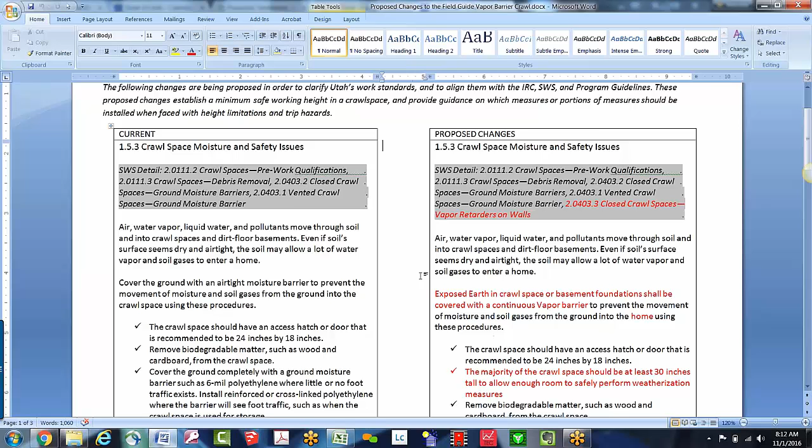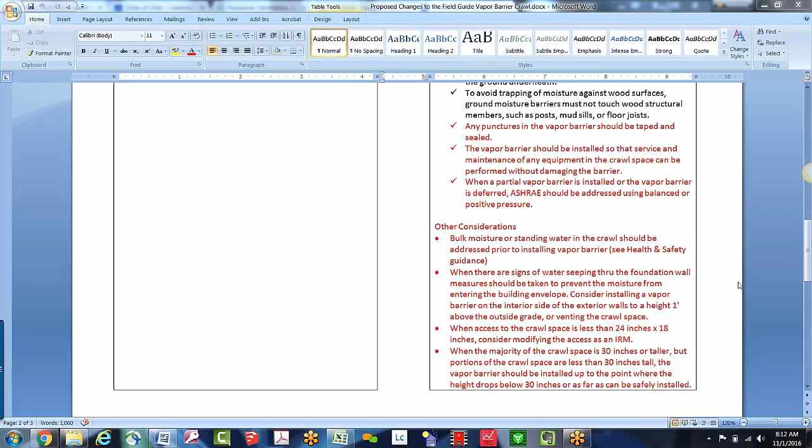What that means for you guys is this whole 30-inch rule will probably go into effect. I've heard some of you already implementing it, and I'm okay with that — just know as you're implementing it, it's not in writing yet. I just wanted to quickly review what we proposed. This was stuff put in front of this group a few months ago for a comment period. That comment period closed, so unless somebody reaches out to me today or tomorrow, we will proceed to put this into our actual rules.

But the main thing here is this whole 30-inch rule, so let me quickly read through it. It says when the majority of the crawl space is 30 inches or taller, but portions of the crawl space are less than 30 inches tall, the vapor barrier should be installed up to the point where the height drops below 30 inches, or as far as can be safely installed. It goes on to say other weatherization measures in the crawl space, such as air sealing and insulating, shall also be installed according to the 30-inch height limitation.

Then the next bullet: when the majority of the crawl space is less than 30 inches tall, the vapor barrier and all other weatherization measures in the crawl space should be considered for deferral. So we wrote this policy to allow you guys, when you run into space limitations in crawl spaces, to defer or not do weatherization measures in that space, but still go upstairs and do all the other weatherization measures that you can do.

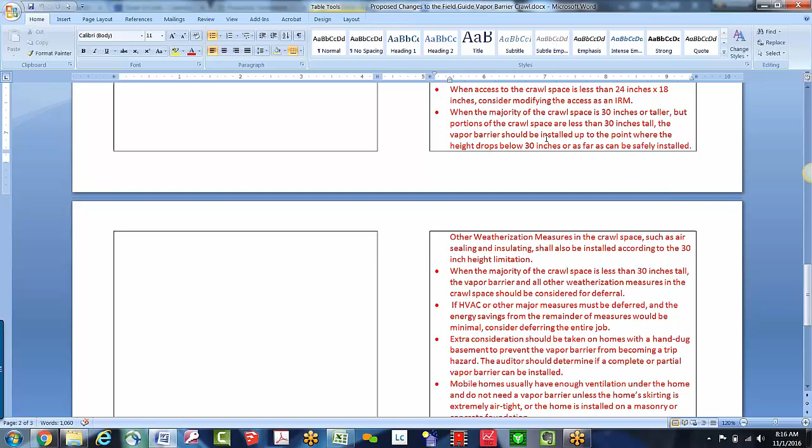I've talked to some guys who feel like we could move this number to 24 inches if we really wanted to. The way we wrote this was so that at each agency, if your coordinator feels strongly that they want you to do work with a height limitation of 24 inches, they can make that decision and put it in writing. But the state standard is 30, and it's up to you guys to implement that and follow the guidance of your coordinators. So just wanted to quickly review that.

Does anybody have any questions or concerns on that before we move on?

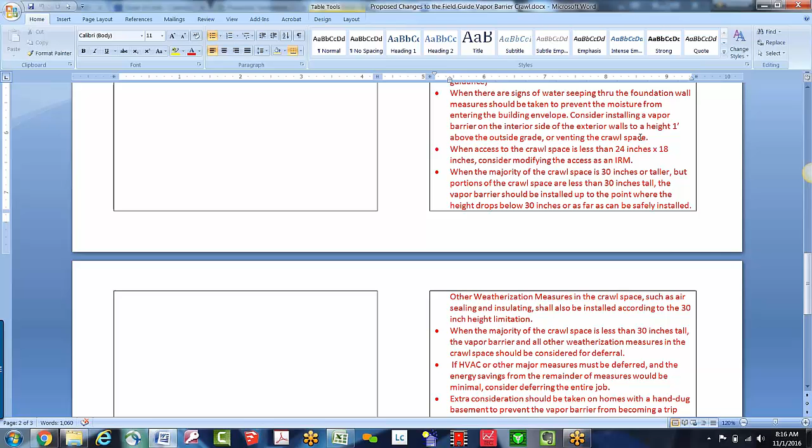I don't think I reiterated it earlier, but this is a proposed change to the field guide. So when we do implement this, it will simply be going in as an appendix to the field guide, if you're wondering where this is going to be.

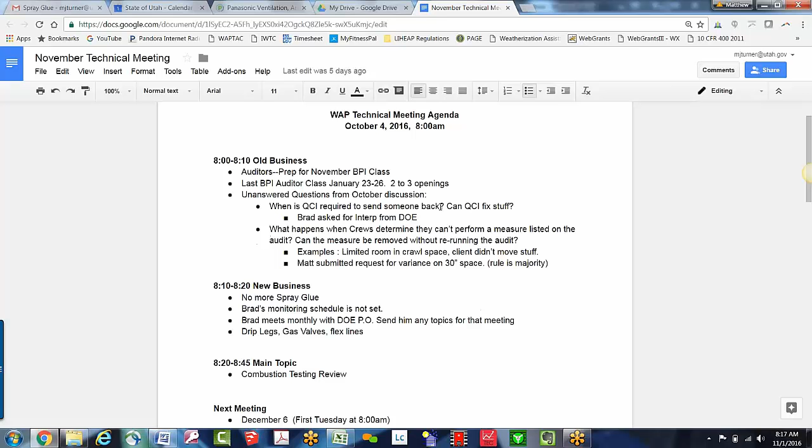All right, I'm hearing no comments on that, so I'll move on. Both of those are still kind of in the works, but wanted to give you an update on those. New business - the first one is no more spray glue. Wade, can you speak to that briefly?

What we discovered was Ian has been doing air monitoring while they're spraying chemicals in a crawl space, which should be part of your confined space safety plan, guys. Anytime you're creating a hazardous environment, you need to be monitoring the air.

I've got some information about the air monitoring equipment he's been using. It's about $1,000 to get the setup. You should all have that. I'll send out some emails with that information for those of you who don't. Anyway, it was very interesting.

We've been using a spray glue that works really well. The can says it's green and safe and friendly and all this business, but testing discovered that it's extremely dangerous. It depletes oxygen levels to scary low levels and caused fumes to build up to explosive limits, so something like an incandescent light bulb or a spark could have blown the crawl space up with everyone in it. Based on the testing Ian discovered, we've decided that particular spray glue, don't be using it.

The other thing that's really scary is this all occurred while he was using ventilation in the crawl space, and the buildup was rapid and large. Thank God they were testing and discovered it before someone got injured or killed.

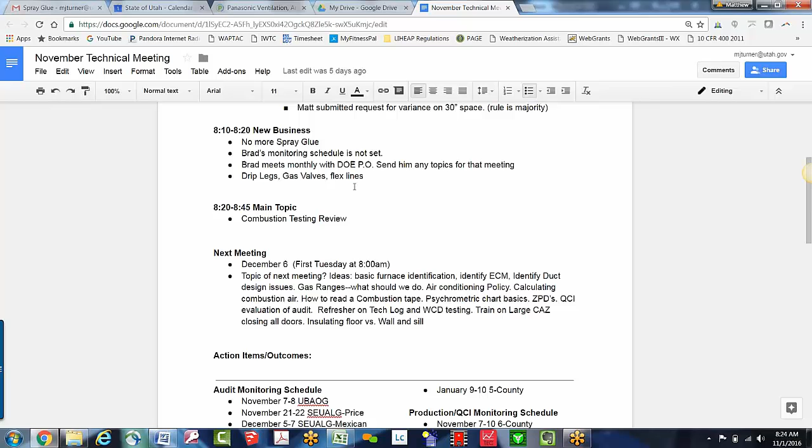This will probably make a little more sense to the auditors, but I want to make sure that QCIs know and understand this as well.

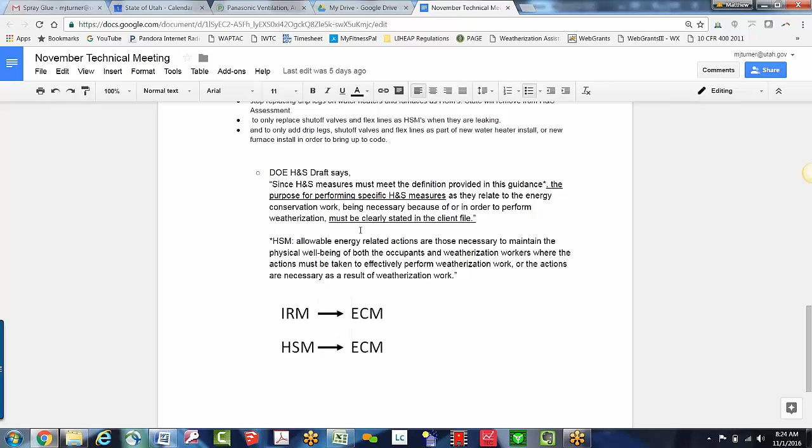When an auditor is auditing a measure, say they've come across an incidental repair measure, like they're going to add some insulation in an attic, but there's a little bit of roof repair, maybe a leak around a swamp cooler. They can write up an incidental repair, and when they write that up, they have to explain how that repair is directly connected, or incidental, to an energy conservation measure. So if an auditor was going to write an incidental repair measure to fix a leak on the roof, they would write in the comments section that this repair is incidental to the energy conservation measure, which could be attic insulation. And now that's part of justifying why you're doing that as an incidental repair. So basically they have to have a nice dark black line that connects that incidental repair directly to an energy conservation measure.

Well, DOE has basically made that same exact connection with all of their health and safety measures. I've been working with the auditors to try and understand this better, and I cut and pasted some of DOE's draft health and safety plan that they've closed the comment period on. We're waiting to see what actually comes out of it. I did not notice any comments based on this, so I'm anticipating that they're going to release it exactly the way they wrote it.

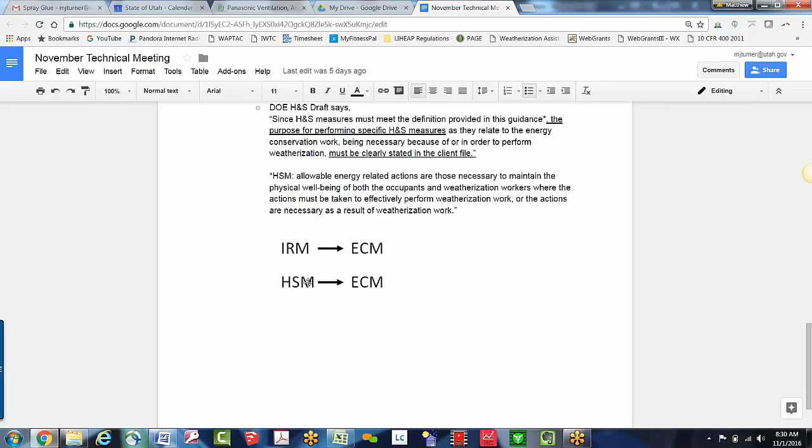So that all of those things would be included in the cost of installing that water heater. I hope that helps, especially the guys in the field and the QCIs, understand why auditors call for these things on some jobs and not others. It's because in order to justify spending the money, we have to have a direct connection to an energy conservation measure. I realize that was a lot.

Does anybody have questions or concerns about that? And what about protecting the employees if it's a health and safety issue, because the employee could get hurt working on something? Yes, and that is exactly...

A health and safety measure is allowable energy-related actions that are necessary to maintain the physical well-being of both the occupants and the weatherization workers. This is the key: actions must be taken to effectively perform weatherization work, or the actions are necessary as a result of the work.

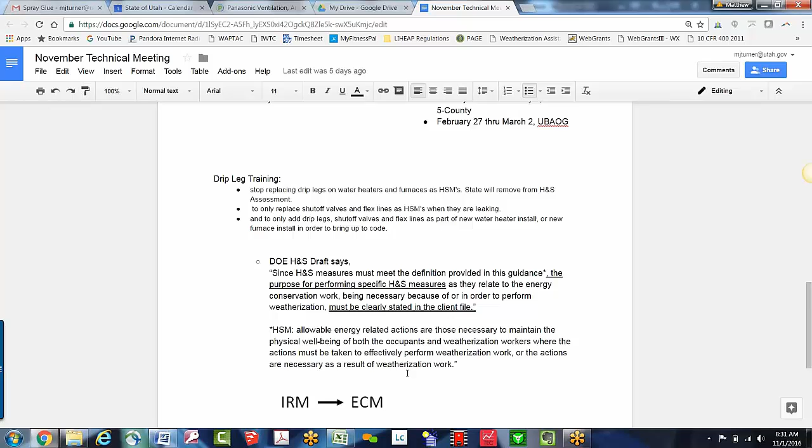So give me an example of where you wouldn't necessarily be able to tie this back to an energy conservation measure, but your weatherization workers would be in peril or their safety could be an issue.

Well, I don't know. I guess you could tie most of it back, but like if there's a stair hazard or something, just going into the basement or going into the house itself.

Yeah, and all of those things, anytime you run into an issue like that, that is a legitimate health and safety issue. There was a home where I saw the electric panel, the door or cover to the electric panel was missing, and they were working right next to it. I could tell from the photos the furnace was right next to the electric panel and they were going to be working in that vicinity.

And the auditor wrote in there, we need a health and safety measure to put a panel cover on there. That kind of stuff is perfectly legitimate. That's exactly what DOE wants us to be doing as health and safety measures.

I think the drip leg is the perfect extreme example, because I can't think of a scenario where anybody's going to get hurt because there's no drip leg. And I think that's the point - somehow this made its way onto a form and into the program, where every time we see an appliance without a drip leg, we put one on it and call it health and safety. The point is that it's really not a legitimate health and safety issue.

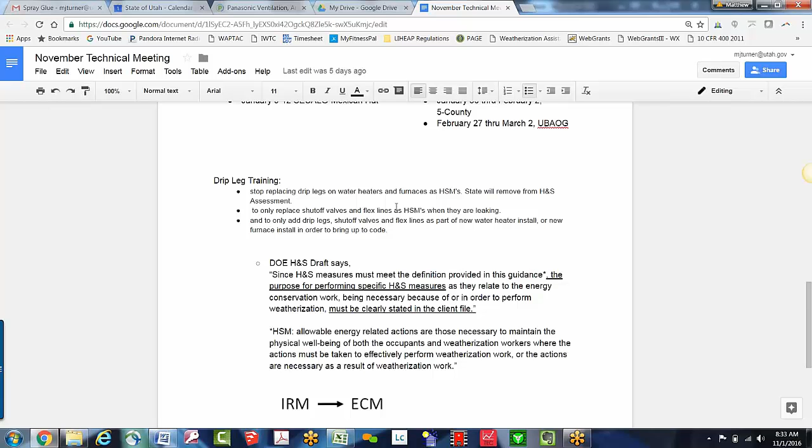I think for the most part, we need to stop installing these unless they're directly related to an energy conservation measure. Does that make sense?

On the drip legs, but another one, we just had a water heater that had an extremely high CO, up in the 1,000 range, and that used to be a health and safety measure. Is that still health and safety because you're not really tying it to anything?

Well, when it comes to that, I like to tell the auditors we want to have a nice dark line here. There's a couple of instances where that line gets a little bit gray. But we've written those right on our health and safety table, and one of the issues on the health and safety table is venting, and then the other one, if I'm not mistaken, is if you have high CO or if you're burning outside of the approved ranges.

So correct. Our guidelines specifically say if CO is over the acceptable limits, consider replacement of the appliance. If it can't be corrected by doing a tune-up, and in those cases where you have a water heater that's well over 1,000 parts per million, chances that you're going to fix that are slim to none. Our guidelines allow you to replace it.

Yeah, we've tried to make a table where there's a bunch of stuff listed, and I've found more and more that we want to make sure if something's a little gray here, we want to make sure that that's on the table. So you'll still be allowed to do that. Make sure you're looking at that table. This is really just a good rule of thumb. If you're kind of thinking through a scenario, this is where you can start, but then go to the table. But we've written right on the table that that's not necessarily a prescriptive list of every single thing you'll run into. So if you use this and the table as a guideline, most of the time you'll be able to determine very clearly whether or not it's a legitimate health and safety item. If you've got questions, I'm happy to chat about it and see if I can give you any guidance.

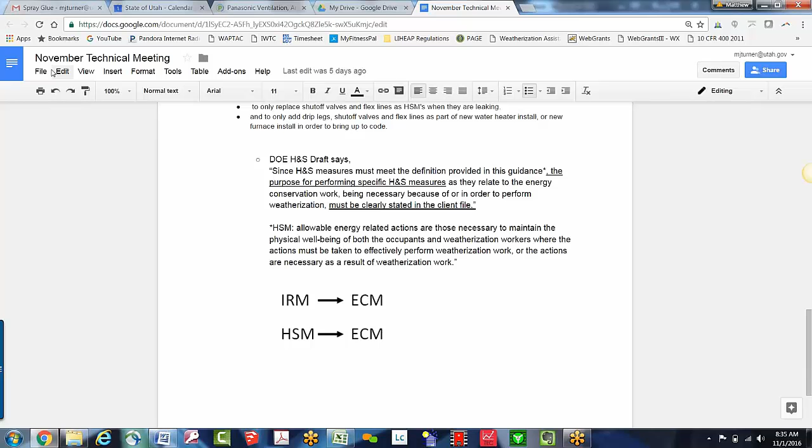All right, Wade, you're up, man. Okay, do you have to share your screen with me, or? Oh, I can make you the... I think I can make you the presenter, can't I? Yeah, I think so. Let's see. Give us a minute, guys, while we figure out how to swap computers. If I'm smart enough to do this, let's find Wade. Okay, I think I sent it to you. All right, can you guys see my screen now? I can see your screen. Got a bunch of purple stuff on it. Yep, we see it.

Okay, can you see that PowerPoint presentation right now? Yep. Okay, so let's go ahead. All right, do you guys see just the PowerPoint presentation without the notes? See the little circle at top, little gene thing? That's what I'm seeing, I'm not seeing any notes. I got too many screens to look at, so I got to make sure we're looking at the right one.

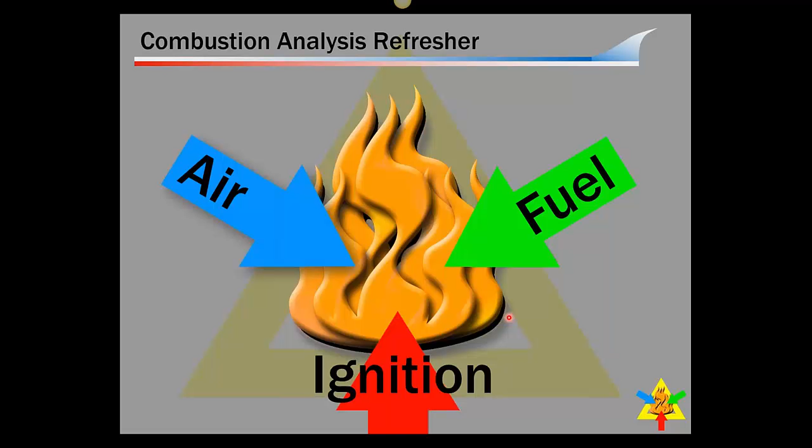Don't all answer at once. Left? Some of you are saying left? That's my guess, okay.

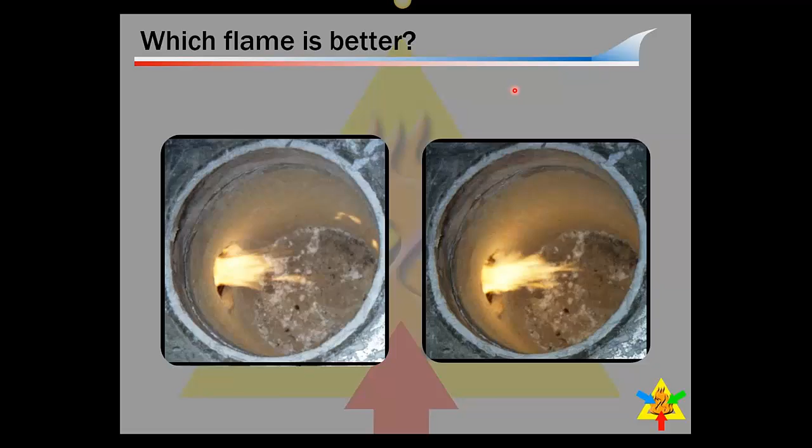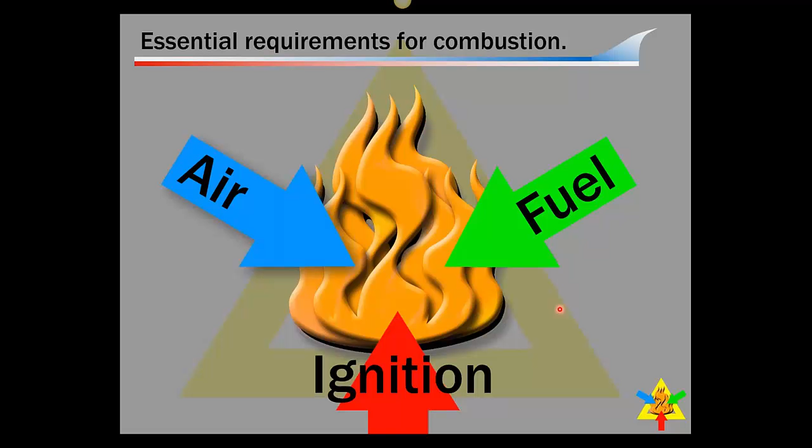So basically, combustion analysis is nothing more than evaluating the air and fuel mixture of an appliance. An incorrect air-fuel mixture will cause the appliance to become inefficient and potentially dangerous. So in order to have combustion, we have to have three things: air, fuel, and an ignition source. If any one of those three components is missing, we'll never have combustion. So we have those three items for combustion, but we also have to have them mixed properly - we have to have the proper ratio in order to get the correct combustion.

So here's an example using natural gas, and we have a 1 cubic foot box with 1 cubic foot of air in it. If I take this box and put 3% natural gas in here, so 3% natural gas and 97% air, and try to ignite it, nothing will happen because there's not enough fuel - I haven't reached my lower explosive limit yet. Now let's look at the other end of the spectrum. Let's say I take this box and put 16% natural gas in it and 84% air, and try to ignite it - nothing's going to happen. Now I've got way too much fuel in the mix. I'm above my upper explosive limit.

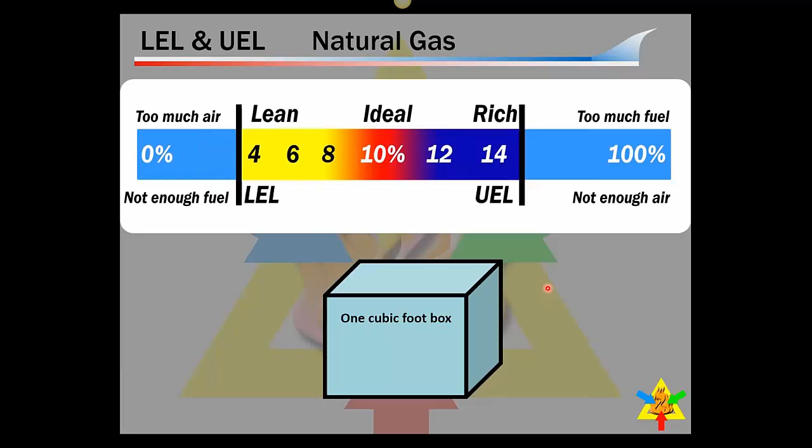So natural gas has a very narrow window of how it burns properly, and the sweet spot is right here in the middle. To have really good combustion with natural gas, ideally we want this 1 cubic foot box to have 10% gas and 90% air - then we're right in the sweet spot. But you can see if we go this direction, we start to lean out, and as we lean out, we'll have problems. We go this direction, we'll start to get too rich, and we'll have problems. So one of the key things about combustion analysis is understanding our air-fuel ratio, and that is what makes our appliance burn properly and efficiently.

So one of the things we saw in our monitoring was guys not understanding proper probe placement, and that's critical when you're doing combustion analysis. You have to take the samples in the correct spot, otherwise you're going to get incorrect readings. And the correct spot is always in undiluted flue gases. So what do we mean by undiluted flue gases? Well, let's start with water heaters, because in our monitoring this is one of the appliances where we saw there was a problem with guys doing combustion analysis. So here we have a water heater, here's the burner, here's what they call the fire tube and the turbulator. Your undiluted flue samples or undiluted gas samples will always be down inside here.

This little component right up on top here is called a draft diverter, or draft hood, and it allows dilution air to enter into the flue. So if you're taking your combustion analysis up here, you have a diluted sample. That means there's excess air and stuff mixed in it. You're not getting a true sample of what's going on at this burner.

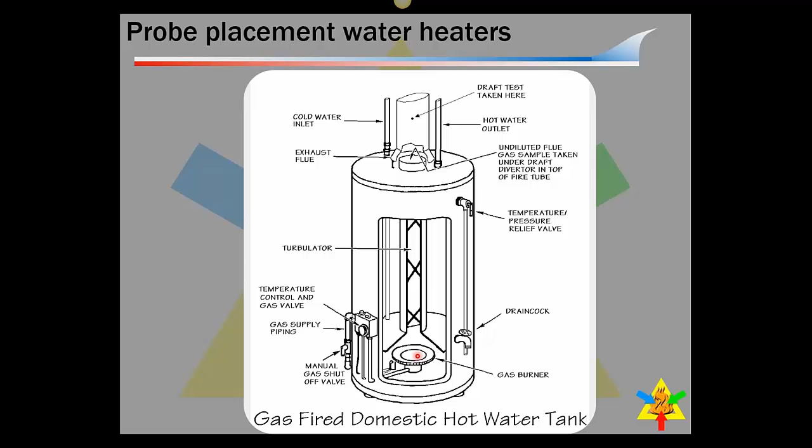In order to get that, we need to be down inside of here. Here's a real good close-up. Again, here's a water heater draft hood. You can see my probe right here, going down into the fire tube or turbulator area. If you take your reading anywhere above this line, you're going to have excess air, because the draft hood's job is to allow air from the room to enter into the flue. So all this air from the room is going up into that flue, and that'll give you a skewed reading.

You're going to see high O2, high excess air, and low CO production. In fact, in some cases your O2 will be over 17%, and most every combustion analyzer out there won't even start doing math and giving you readings until the O2 drops below 17%. So again, we've got to be down in undiluted flue gases.

So here's how they did this: they simply drilled a hole here, angled the probe, and got it down in there. You can drill a hole in the draft hood and stick your probe through there. Sometimes you can get your probe under the draft hood and get it in there. But one thing I want you to notice - and I'm sorry this picture's a little blurry - the CO in the undiluted flue sample is 20 parts per million.

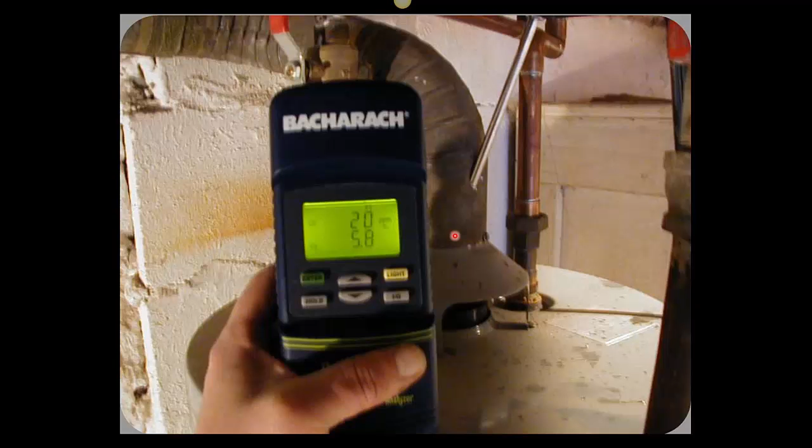Now let's go to the diluted sample. Now we put our probe in the wrong place - we can see we're above the draft hood. Now we've got all this dilution air entering the process, and look what my CO did: the reading dropped by over 50%. So we're getting a skewed reading. What is really going on with that burner is down here.

So probe placement is critical. This is one thing we saw in our monitoring that guys didn't understand. Our draft reading would be taken up here somewhere to get our draft, but for combustion analysis we've got to be down here below this draft hood, because the job of the draft hood is to allow tons of excess air to enter this flue. It helps keep the flue dry, it prevents the flue gases from condensing, and it adds volume to the flue so that the flue can actually vent. That's what dilution air does.

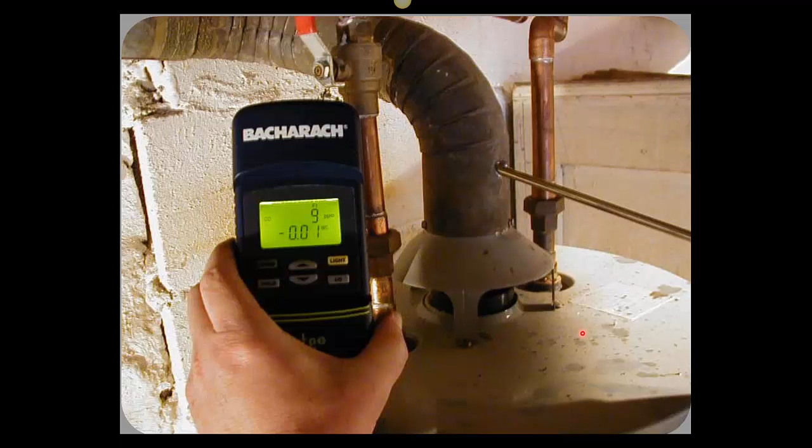Another type of draft hood you might run into out in the field is this - it's called the bell-shaped draft hood, and they're very common on boilers. You basically have a pipe here, then this bell-shaped looking deal, and then the pipe continues. If you run into this, you need to take your sample before the draft hood, because this draft hood is allowing air to enter and mix in the flue right through this area. So we need to make sure we're taking it down here. I've seen guys try to test them up here because they simply didn't understand what the function of this thing was - it's just another type of draft hood that allows outside air to mix with the flue to help it vent and stay dry.

Draft test, of course, we would do above it. Combustion we do below.

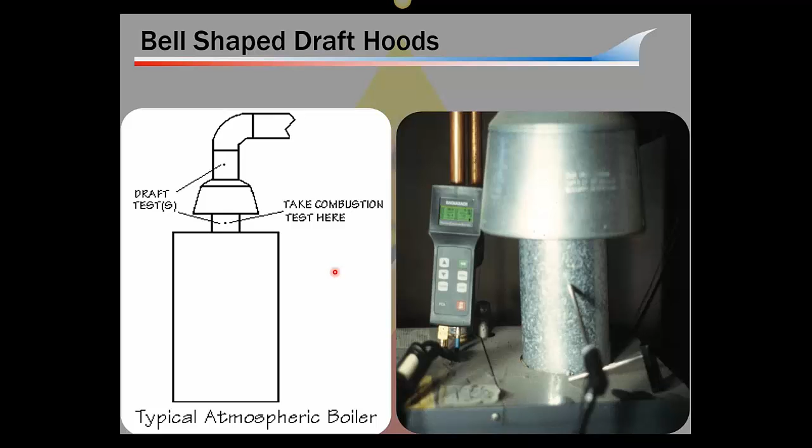This is a mid-efficient furnace - any furnace that's 78 to 89% efficient. Proper probe placement for combustion analysis is within 18 inches of what we call the breech. This is the inducer motor, and this point right here where the inducer motor connects to the flue is what we call in the industry the breech. So we want to be up above the breech, somewhere around 18 inches - maybe right in the middle or at the top or whatever - but this is the best place to do a combustion analysis on a mid-efficient furnace, about 18 inches above the breech.

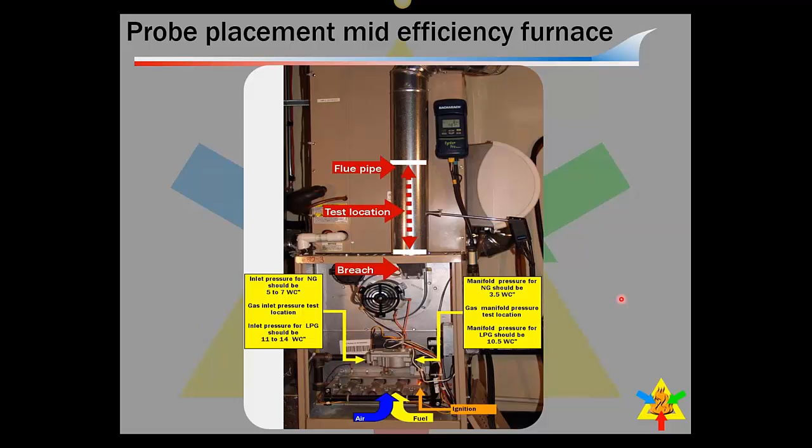Of course, on high-efficient furnaces - high-efficient is anything over 90% - we can drill a hole in the flue. We want to be in a vertical piece of flue, not a horizontal piece of flue. Does anyone know why we wouldn't want to drill a hole in the horizontal piece?

They have water in them, because these flues are full of water. If we drill a hole in a horizontal piece of flue, we could probably make a place to trap water and have a better chance of condensation leaking out of the flue. So if we do it in a vertical piece, we reduce that possibility.

You can also go to the termination of the flue. That's a great place to do it also, is at the termination.

On these flues, we need to make certain that we plug the hole, because high-efficient furnace flues, or furnaces with PVC flues, this flue is under positive pressure. This inducer motor is now actually pressurizing this pipe and forcing the flue gases out. If we leave an open hole in it, flue gases and water vapor are going into the home.

On water heaters and mid-efficient furnaces, I personally don't care if you plug the hole or not. That being said, sometimes people freak out if you drill a hole in their flue and don't put a plug in it, so probably a best practice is just plug them. But at the end of the day, if you don't plug those holes, nothing bad's going to happen.

They're negative pressure flues. When they're working right, they'll suck air into the hole. These ones are different, they're positive pressure. We absolutely have to close that hole off.

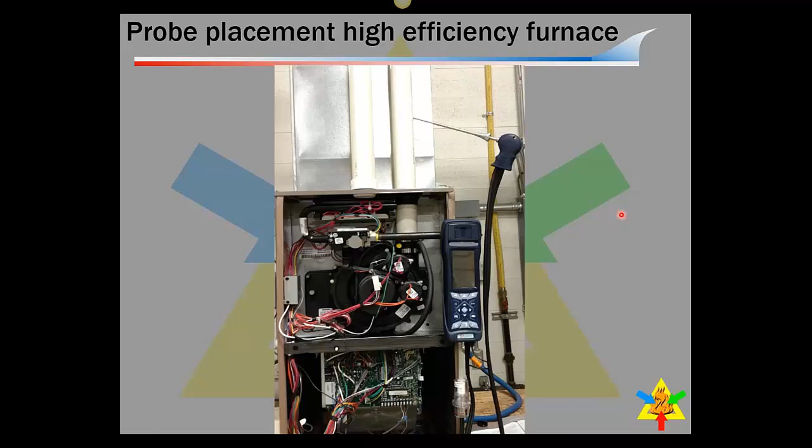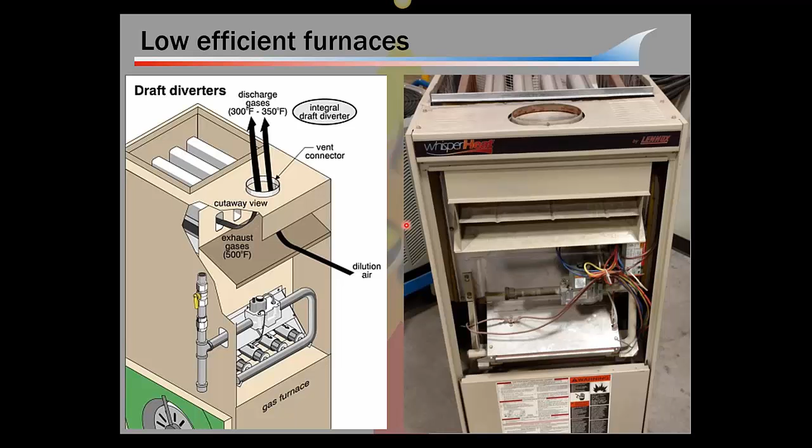Our high-efficient and mid-efficient furnaces, all of those burner gases mix together, okay? But here they don't mix until they get in with the dilution air, and if we measure here, we have a diluted sample that's not a real representation of what's going on in each of those burners. Does that make sense? Thank you. You're welcome.

So, does anyone have any questions on probe placement? It's pretty rudimentary, but because we saw some issues with it in our monitoring, I wanted to talk about it and make sure you all understand it. So, any questions before I move on?

Okie doke. So now that you know where to put the probe, you push the print button and this tape comes out with all these numbers on it. So what the hell do these numbers mean to anybody? Well, that's one thing we saw in the field - guys knew where to put the probe, then they push print, and I ask them about the tape, and they just go, I don't know, no one's ever told me what any of that means.

So we're going to go over and just give you some basics. This stuff gets pretty in-depth. And when we're all done, I will give you some reference, or if you want to take the initiative and learn more yourself, you can. But in order to understand these numbers and what's going on, I've got to discuss a little bit of science, okay? So bear with me.

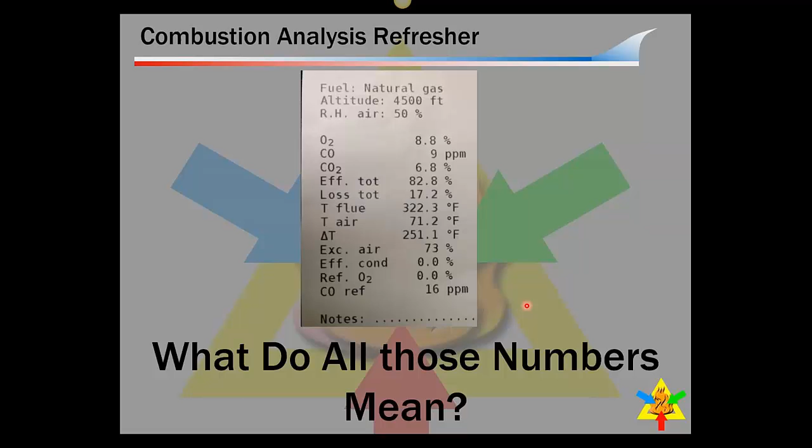We need to understand this relationship because we have this thing in combustion analysis called excess air. And when you have excess air, you have a lot of nitrogen in the process. We'll talk about how that affects the process. But the air we breathe is only 21% oxygen. The rest is other stuff, nitrogen being the biggest amount of stuff.

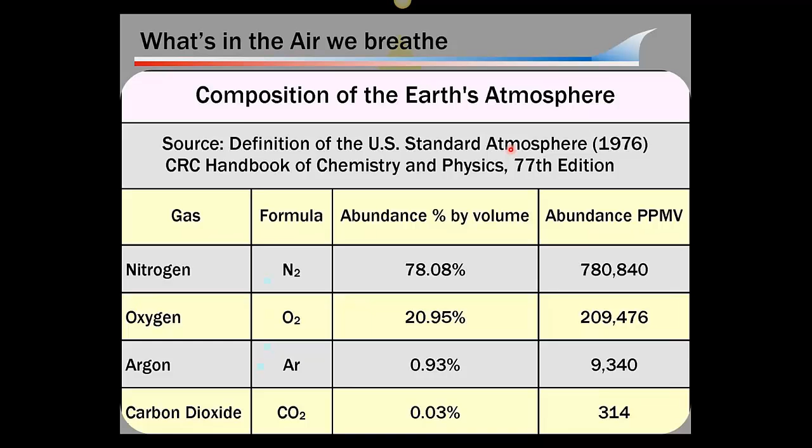Just FYI, at levels below 19.5% oxygen, human beings will start to have problems functioning normally. And at levels below 6%, you'll die immediately - death is immediate. So this, when you turn it on, is just telling you, hey, you're in the atmosphere - there's 20.9% oxygen in the air that this machine is sampling.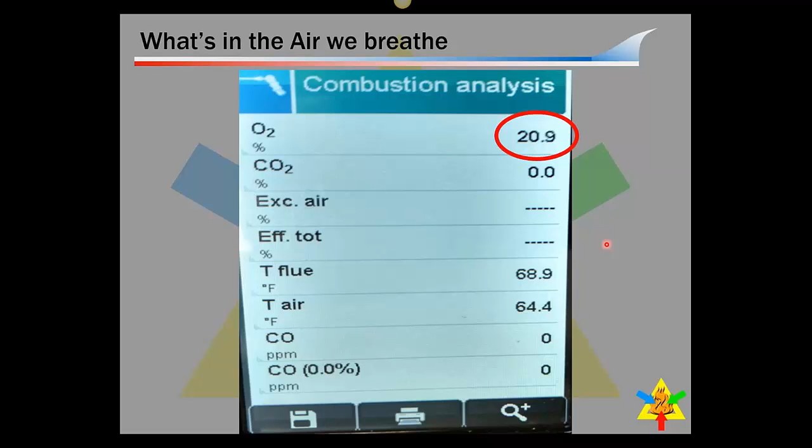So again, we just need to emphasize the air that we breathe is the air that we're using for combustion. In order to have combustion, we have to have air, fuel, and ignition. So the air we're using, again, is 21% oxygen and the rest is nitrogen.

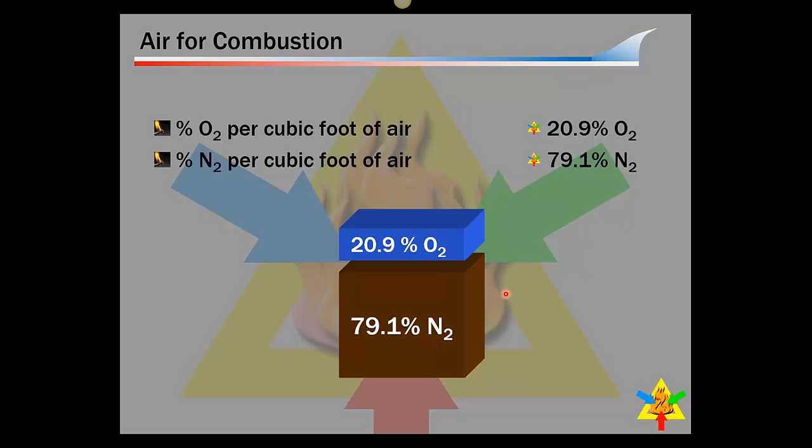So again, how does that all play out? Well, nitrogen basically - we say in the combustion world that it does nothing to the combustion process, and that's sort of true. It does nothing to help the fuel burn. Nitrogen will pass through the combustion process unchanged. We'll talk about that a little bit more.

But it does have some problems. Nitrogen loves to absorb heat - it'll suck up a lot of heat out of the system. So if we have a lot of excess air, or nitrogen by default, it'll start to reduce the flame temperature dramatically. A good example of this is natural gas, when burned in any combustion appliance in the Earth's atmosphere, will have a flame temperature of about 3,500 degrees.

If you could take that same natural gas and burn it in 100% oxygen with no nitrogen in the mix, your flame temperature will be well over 5,000 degrees. That's the effect that nitrogen has on the system. And so we have to be aware of that fact because we deal with this thing called excess air.

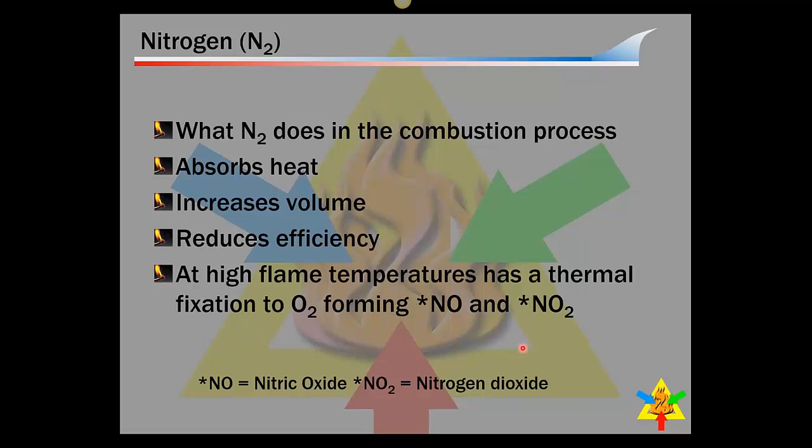Nitrogen increases the volume of the flue gases. It reduces the efficiency of the combustion process. And at high flame temperatures, you'll start to form these things called nitric oxides and nitrogen dioxides, which are poisonous greenhouse gases basically. So that's why I brought this up - we've got to be aware of what's going into the combustion process in order to understand what comes out the other end. And of course, we've got to understand how the combustion process works.

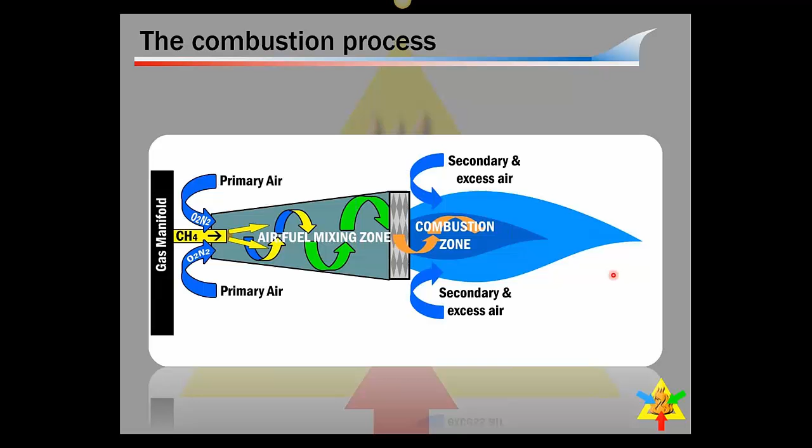The thing we don't want is incomplete combustion, and that's kind of what we're going to talk about next a little bit here. Here's where we get a little science-y, you guys, so bear with me.

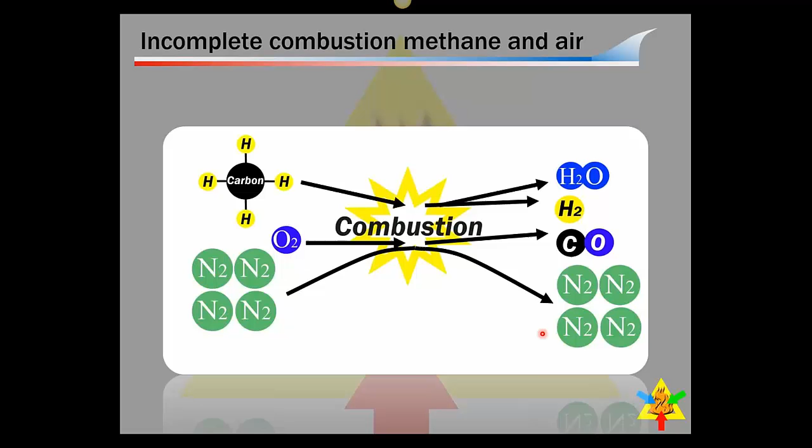All right, hopefully I'm not boring you too bad. So here's where we get into what do all those numbers mean, okay?

They're inversely proportional, which simply means if one changes, the others will change. So if I increase my O2, my CO2 will decrease, inversely proportional. As this goes up, this goes down.

If I increase my CO2, my O2 goes down. And O2 and excess air will always go the same direction. It just makes sense. If I'm putting more air into the mix, I've got more leftover oxygen and more leftover excess air. Okay, so that's kind of a thing that we need to understand how those work.

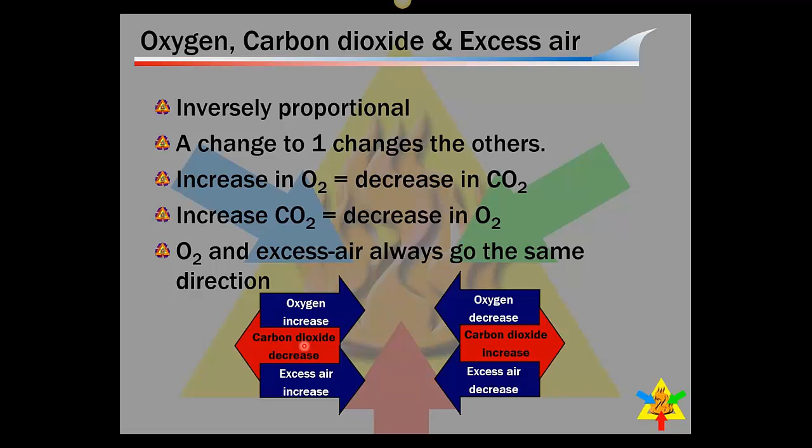They're inversely proportional. As oxygen increases, excess air will follow it every time. As oxygen decreases, excess air will follow it. And carbon dioxide does exactly the opposite, okay? So for every action, there is a reaction. So we're going to go through a few of these here.

And again, remember, guys, all we're doing is adjusting the air-fuel mixture. There's only two things that we can change, air and fuel, okay? But it's amazing the effect it can have.

So let's start with a decrease in the supplied air to the combustion process. Well, if I have less going in, it makes sense there's going to be less coming out, right? Less O2 measured in the flue gas. Remember that CO2 and O2 are inversely proportional, so higher CO2, and this condition may result in incomplete combustion, forming carbon monoxide due to a lack of air to mix with the fuel. If I don't have enough air in the mix, I have the potential to have unburnt fuel.

Okay, so remember the molecules I showed you. I've got unburnt hydrogen coming out. I've got carbon mixing with oxygen to create carbon monoxide.

Well, let's put too much air in the mix now. So I'm going to increase the air supply to the process. Well, if I have more air going in, it stands to reason I'm going to measure more O2 coming out, correct? And of course, my carbon dioxide, being inversely proportional, is going to go down, and this may result in incomplete combustion forming carbon monoxide due to cooling of the flame.

Remember when we talked about all that extra nitrogen that's in the air? All that extra nitrogen cools the flame, and if I've got a lot of excess air in the mix, I'm going to start cooling my flame, and if I cool my flame, it starts screwing up my combustion process, and now I've got unburned hydrocarbons moving through the process, creating CO and soot.

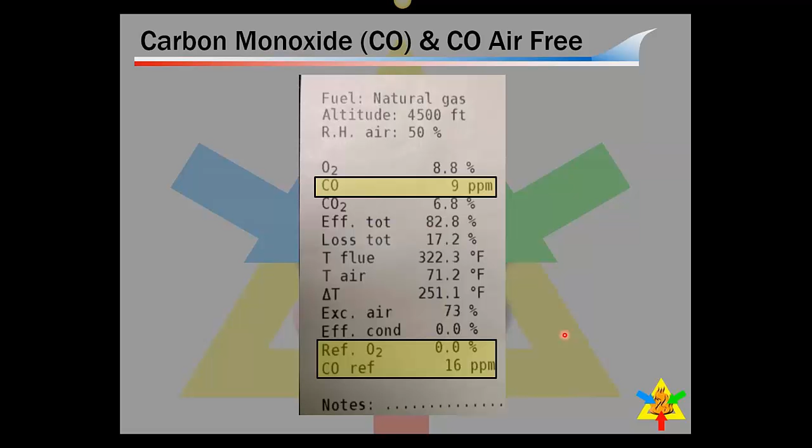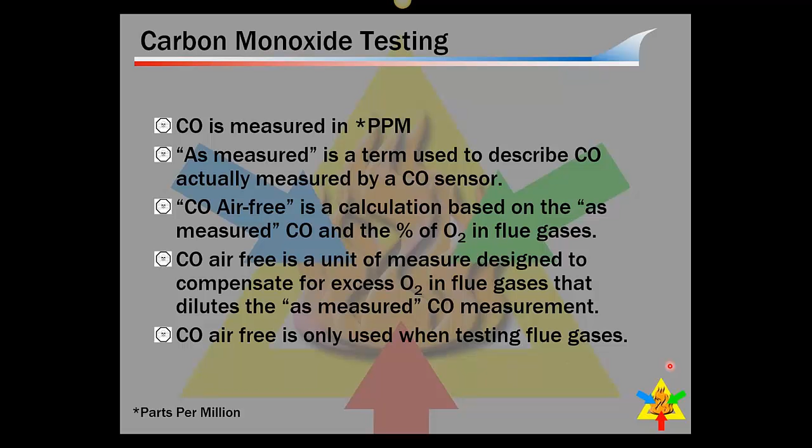So just to recap: CO is measured in parts per million. As measured is a term used to describe CO actually measured by a CO sensor. Air-free is a calculation based on the as-measured CO and the percentage of O2 in the flue gases. If anyone wants to geek out on the table to use the math, let me know—I'll send you the table. You can figure this out with mathematical formulas. CO air-free is a unit of measure designed to compensate for excess O2 in the flue gases that dilutes the as-measured CO measurement. CO air-free is only used when testing flue gases. When we test ambient CO, it's always as measured.

So here's some other information that the tape gives you. This is called efficiency - EFF is efficiency total, and this one tells me loss. These two numbers will always equal 100%. So this is telling me this furnace is 82.8% efficient - it was an 80% furnace. So 82.8% of the gas it's burning is being used for heating the house, and 17.2% of it is lost out of the flue, or wasted.

This number should closely match the rating of the furnace. So for example, if you can find the sticker on the furnace that has the AFUE rating, the annual fuel utilization efficiency - in this case, the furnace had an AFUE of 80%. This number should be within a couple of percentage points of what it's rated at. So it was at 82.8. It's right where it should be.

And by the way, auditors, if you have a furnace and you can't find the efficiency of it - you can't find it in the Preston's guide because all the model and serial numbers are missing or whatever - you can use this number, the AFUE rating of a furnace, the annual fuel utilization efficiency. So on this particular furnace, I didn't know what its efficiency was because I couldn't find it anywhere. I can take this number and put it into the NEAT input tool and say, yep, this furnace is 82% efficient. And that is a very accurate number.

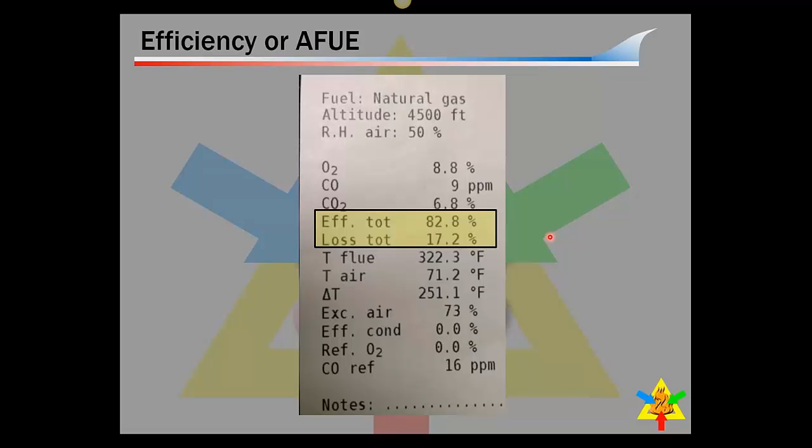Okay, this is the flue or stack temperature. Our combustion analyzer will measure the temperature of the flue, and that's what this is right here. There's an actual temperature sensor in the probe.

On water heaters and mid-efficient furnaces, this should be between 300 and 500 degrees when that equipment is up to full operating temperature. I've seen too many tapes on water heaters where this number was like 125. That tells me they took their reading immediately at startup - they didn't wait for it to warm up a little bit. That's easy to pick out, and lo and behold, when I see that, I see these other numbers skewed too.

So water heaters, mid-efficient furnaces, and atmospheric boilers - this number will be between 300 and 500 degrees when that thing is up to operating temperature. On 90% furnaces, it should never be over 140, and you can see it as low as 90 degrees. Okay, that's no big deal.

This is the temperature of the air used for combustion, or the air around my combustion analyzer. My combustion analyzer is in the same room as the furnace when I did this, and so the air that furnace is using - because it's an 80% and takes its air for combustion from the room it's in - is 71 degrees. This is just called the delta temperature. It's just this number minus this, and it gives you that.

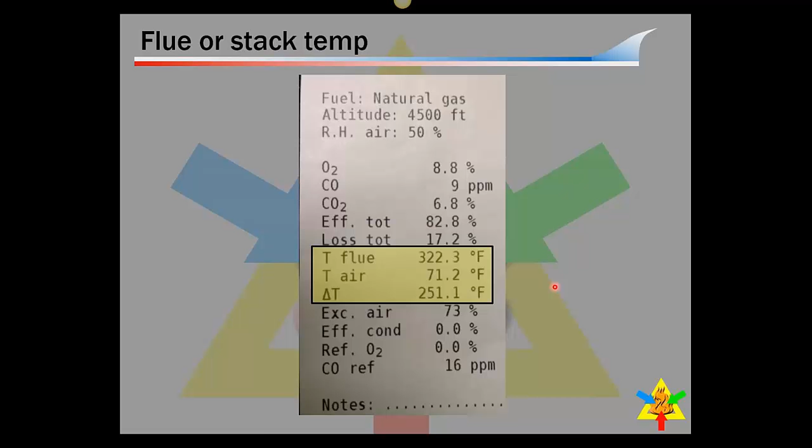So if this machine is in my office and my office is 68 degrees and this is not plugged in, this machine is going to say, yeah, the air around me is 68 degrees. And that's all good and fine if you're doing readings on furnaces that are pulling their combustion air from the same room the furnace is in - water heaters, 80% furnaces.

But when I get into high efficient furnaces that have two pipes, one being the flue or exhaust and the other being the intake, if I'm standing in the house and the house is 68 degrees, but the outdoor air is 0, there's a large temperature difference there, is there not? And this probe needs to be used, and this inserted into the combustion air pipe.

You drill an 1/8 inch hole in the combustion air intake and put this in, because the machine, in order to do accurate math about efficiencies and stuff, has to have accurate input. It needs to know what is my intake air temperature? If my furnace is pulling its intake air from the outside, and the outside is dramatically different in temperature than the inside, I need to get that reading so I get accurate numbers.

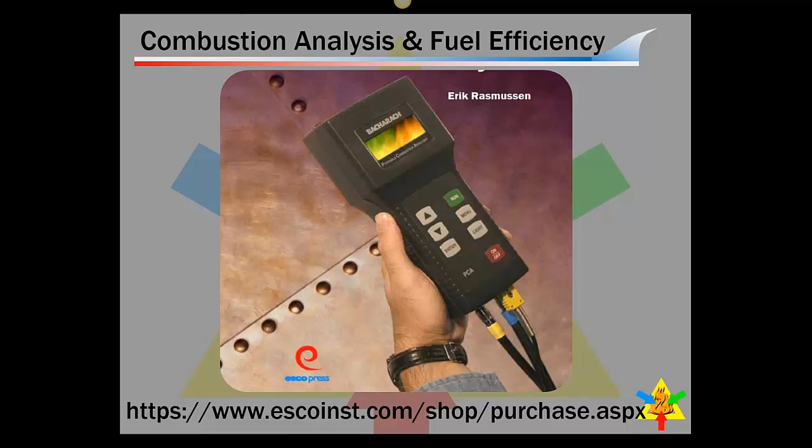So anyway, that's all I got. Do you guys have any questions? Is anyone even still there?

I'm still here, Wade. And that's been very, very helpful for me, who knows nothing about combustion.

It was a whirlwind thing. You know, anytime you guys have questions, that's what I'm here for. So if you got questions on combustion analysis, please call me. Hopefully that was informative and not too boring for you. If you want to know more, call me.